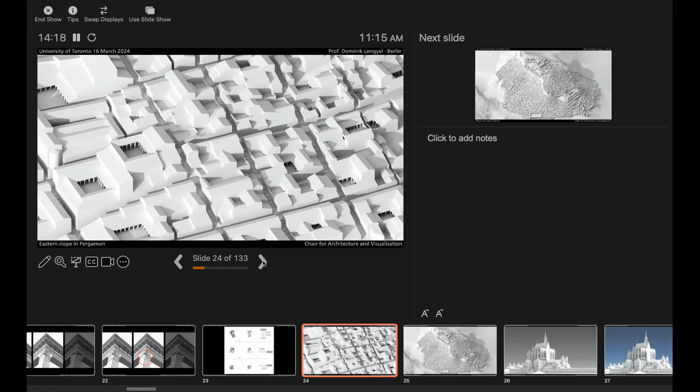And of course, getting the water away—very important. This methodology allowed us to fill the entire mountain of Pergamon in a way that resembles the type of buildings archaeologists assume to be probable, while intuitively not reconstructing or simulating physical reality. The reason it looks so natural is that it's done by hand, by hundreds of students in our seminars.

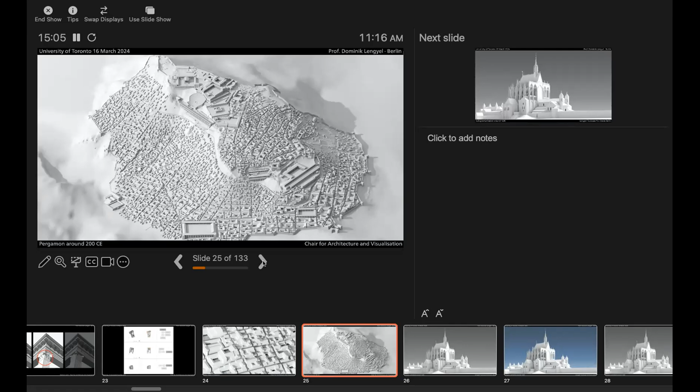We divided them, giving each student a parcel, and explained how buildings were constructed at that time, then let them design—being architects, designing their own small section of this holiday resort, if you want to call it that. In the end, we had a completely heterogeneous result, but still following certain rules—not repetitive, and not algorithmically created cityscape.

Another example that shows different knowledge certainties: this is Cologne Cathedral. You have the Gothic choir, which stands today. You have the last predecessor on the right, which was cut in half exactly along the middle axis to allow construction of the Gothic choir—quite well known because of contemporary depictions from medieval times. On the left, you have a church that was almost not documented. There are foundations allowing us to claim a main nave, two cross naves, two apses, and four towers. Because we don't know much more than these words, all you can see on the left is exactly that.

To make things comparable, we did not depict the existing choir as it is today, with joints and dirt and all that, but reduced it to the same architectural, idealistic way—white and regular, with all pillars identical, even though in reality they're not totally identical. This dematerializing lets you see different architectural styles next to each other, comparing them as they are in the architects' designs—Gothic versus Romanesque versus simple Romanesque in one consistent image. So sometimes we have to reduce the knowledge in order to work together with architectural styles that we don't know much about. It's a kind of weighing against each other.

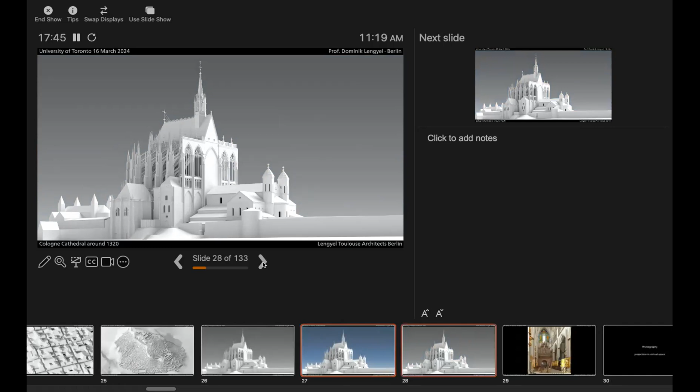If you now look at the sky turning blue, concentrate on the building and observe what happens to it when the sky changes its quality. So now you have a white building, and that's the important difference. Because this is not a white building, it's black and white photography. There are many competitors in the field that use black and white buildings now, but they don't dare to make the sky gray because they think it's ugly. The blue sky is more beautiful, and they don't realize the difference in perception, that this is not a white building.

So if the findings are polychromous, we can follow the same methodology, only showing what we know and not inducing any fantastic creativity that we, of course, would have if we wanted.

In this case, it's the interior of the same Gothic choir. It's a later age, around 1856, just before the demolition of the wall. The wall, if you've seen from the outside, is this wall here in the middle, the same wall that we have in front now. Just before the demolition, they inaugurated the singing choir, and they just wanted to see how it looked like.

So the only colored element that is not based on findings is the organ. But it's so unimportant in its color—it's just showing, well, it's wood essentially, and it has been wood. This is known. All the rest is documented in its detailed color.

Now, why is photography so important? We actually call it virtual photography because we think that we just follow photographic rules, and it's not a rendering. Most people would say if you have a digital model, you do a rendering. Yes, it's true, but a rendering implies so little of photography that we prefer to call it virtual photography. This is actually the epilogue that I added in the end.

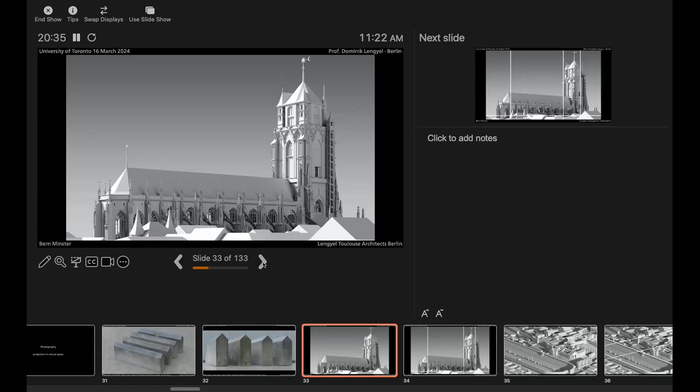But the second thing is straight lines. Usually in ordinary photography, or even in the news, some people that just shoot photography—it's mostly neglected that perpendicular lines remain perpendicular. In real architecture, it doesn't really matter, because you understand architecture since you know architecture. But in case of abstract geometry, you might get completely confused, because it doesn't reveal as many clues as real architecture for being oriented in space vertically. So what we need to do in digital images is be careful to remain vertical when you have vertical geometry.

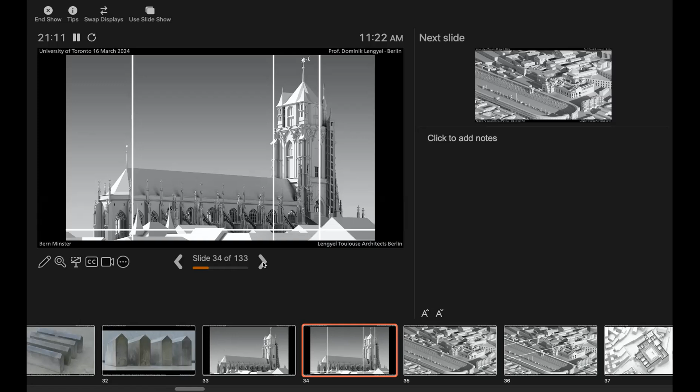Just think of the fortification of Troy again, which is slightly tilted, and this slight tilt is expressing fortification. So sometimes the slightest tilting expresses very important things in architecture.

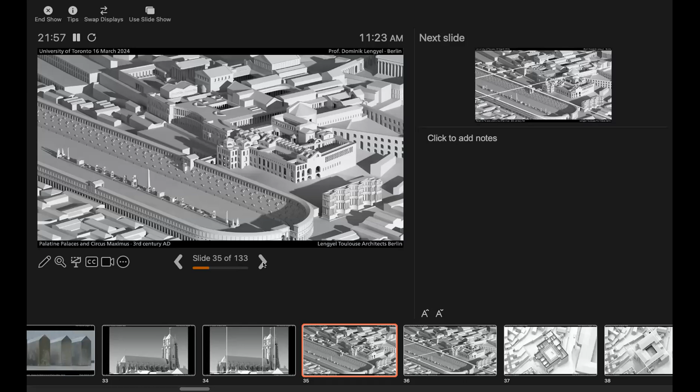Now, if you have to have an overview—Rome, Palatine Palaces in this case—the misunderstanding potential lies in the point of view again, because this is, of course, not eye level. So you might stand on a mountain, and to intuitively make you not think of standing on a mountain, you use projection which is not perspective but parallel. It's called axonometric, and axonometric projections don't have this point in space for the projection. It's all parallel, which means that if you shift the projection or the scene before your eyes, nothing changes except the section of the image.

It's unlimited in each direction, meaning that parallel lines in space remain parallel in the projection. You can even stress this method of projection by using the so-called skewed axonometry, which is even surrealistic. So this one is almost surrealistic—it equals the projection from a very distant point in space.

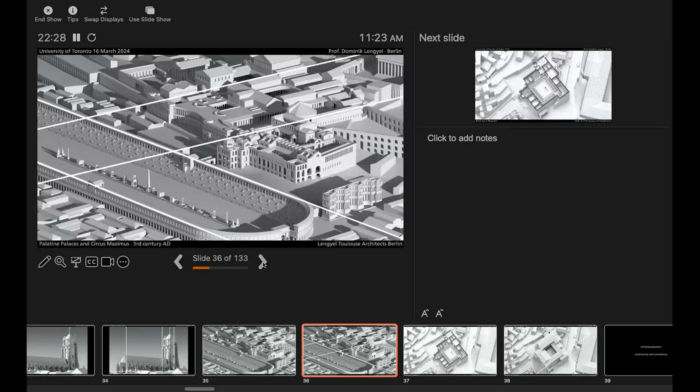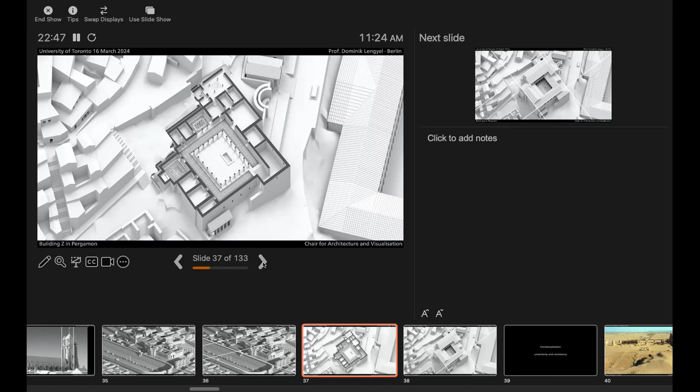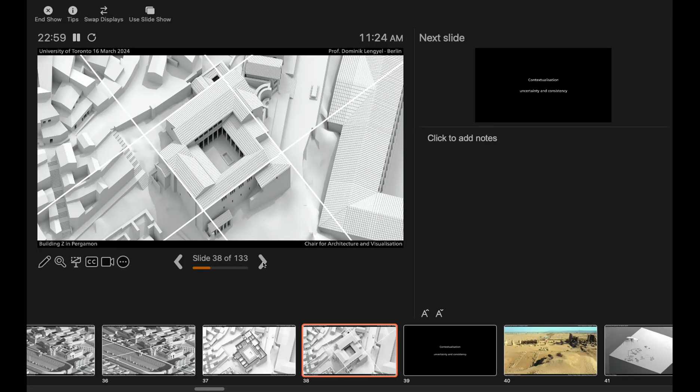Could be a satellite image or so, but this is not realistic. It's entirely surrealistic because it shows the unskewed plan, and at the same time it shows the sides. It's a very common projection technique for churches for the last centuries of architecture. So all we do is assemble centuries-old traditions and put them together into digital images. Again, it's parallel, and you understand the space very well, and you can see straight angles, but at the same time you see the sides, so it's more spatial than a pure plan.

Contextualization is how to put things that are found in space or in other circumstances back into architecture.

Sudan, the royal city of Naga, around 0 CE or BCE, the black zero or the red zero.

The challenge was to develop a kind of vision of the cityscape, which is quite difficult because there's almost nothing.

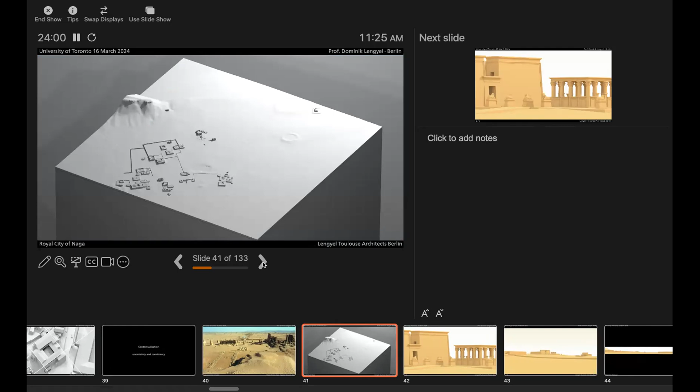What we did is choose virtual photography-like points in space, then project them in very high resolution and create kind of panoramas, 14 meters long with 100 dot per inch resolution, to put them in the museum.

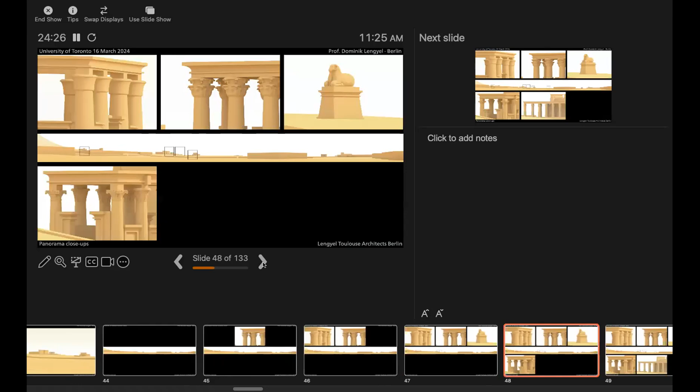So you have the panorama and the close-up, all within the same image. These are real close-ups of the same panorama.

It worked like if you were on site in the museum, you had this as a backdrop from the original findings. And this is one of the temples seen from the inside.

Again, as architects we're interested in the temporality of approaches. This particular vision of being in a very dark interior and looking out to the sun is timeless.

This is Cumae near Naples, a completely different site, thousands of kilometers away, but giving a very similar impression.

So in Munich it was exhibited like this, a kind of real-scale wallpaper to make you feel you were inside the temple.

It's a little bit turned around because these stones stood in front of the temple. But it worked well because you were inside a building, and now you have this look from the inside to the outside.

But the second one was even more interesting — that was the backdrop. Because if you stand there in the museum and look at these heads, you have this high resolution image behind them.

The eyes accommodate for the short distance, and the resolution of the image in the back was higher than what the eye needed. It made you feel standing in the desert immediately.

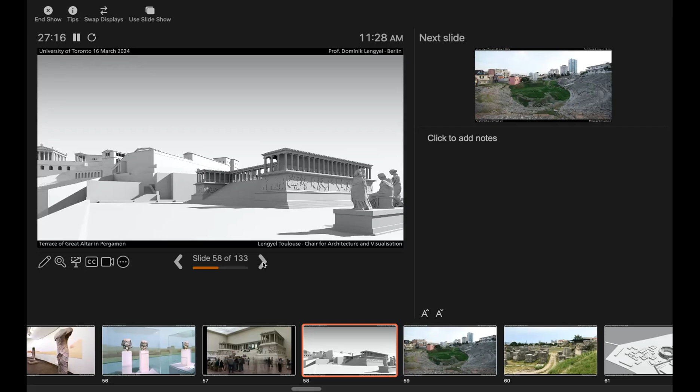The scaffolding was 8 meters tall, with the argument that you needed that height to get a cityscape view. Afterward, we checked whether the ancient architects had thought about that — and of course they did.

This is the cityscape point of view. Maybe they constructed this artificial terrace just to achieve it — it drops 20 meters down if you fall back to the left. They probably built it just to get this prospect of the city.

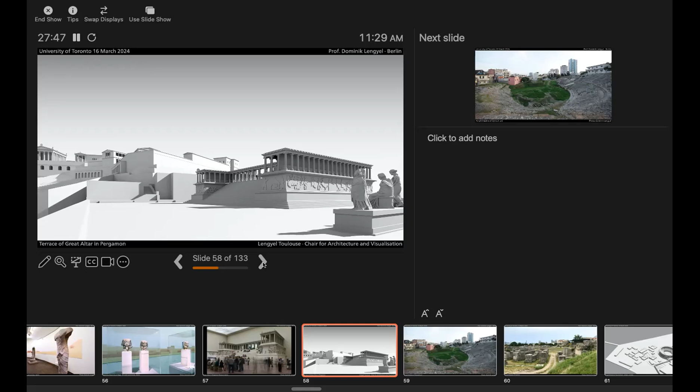So that's one of our overall ambitions: to explore these ancient sites and look for timeless architectural qualities that people thought about 2,000 or 2,500 years ago already, as we do today — or maybe even better.

An amphitheater project in Durrës in today's Albania shows this problematic challenge again. There's almost nothing left, so we compared it with the closest example of a similar area, similar topological and political setting. It might have been the model for Albania.

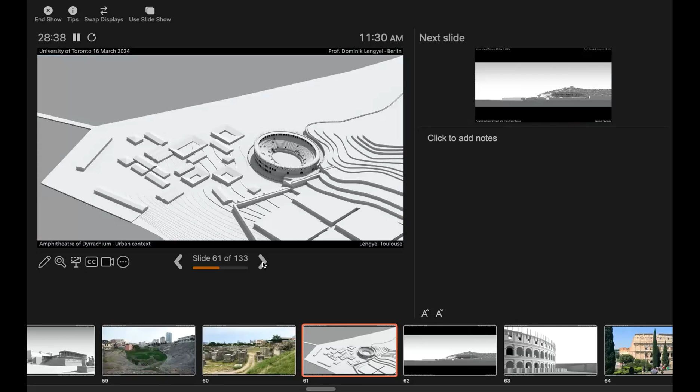This is Pula, a little bit north in Croatia, much better preserved, but no tunnels. So our archaeologists needed the tunnel to develop this theory about being totally asymmetrical in construction and circulation. You see strangely cut things, it's half in the mountain, and all the vomitoria are irregular.

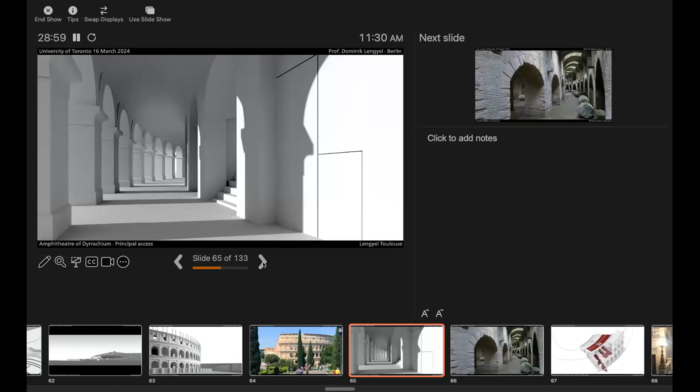The systematics, it's all about idealization. So this is the ideal entrance into an amphitheater. If you compare this with Verona, it's almost similar. This is the standard vomitorium. So idealization, and this is all very important to understand before we come to our Ktesiphon example, which is very, very less concrete.

Again, Palatine, this is what it looks like today. This is how Piranesi looked at it, and this is what we did of it. Again, it was us architects, strangely enough, who for the first time looked from this point of view at the Palatine palaces.

The story behind it is that archaeologists presume it was completely under construction for centuries, so it never looked finished. It was always scaffolded, because they wanted to show the public, the populace, that they were very, very rich and could afford transforming the palaces all the time.

So we thought, well, if it was to impress the populace, why not show it from a seat on the upper part of the seating, seeing these palaces, watching the spectacle of the circus, but also watching the scaffolding, or in this case, the idealized version of the palaces on top.

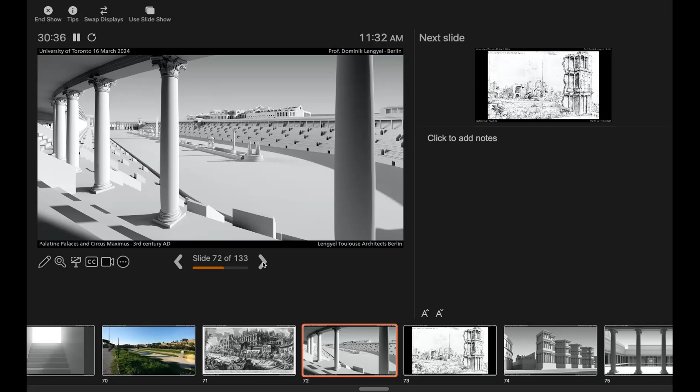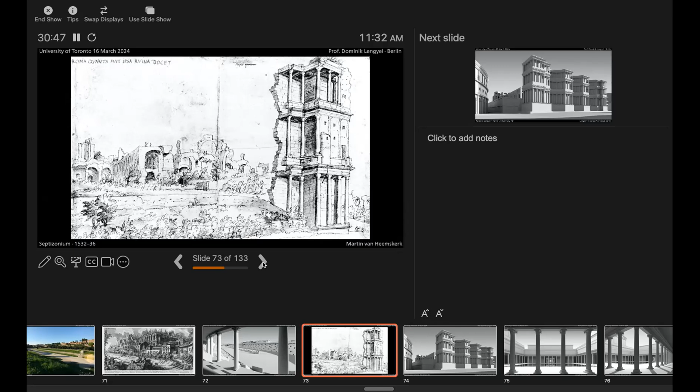There were some parts of the reconstruction that were built, painted, or drawn by people in the 16th century, which were then demolished or just disappeared afterwards. So we had contemporary drawings for reconstructing this.

Septizonium, on the left, you see the circus again. But for us architects, the most fascinating thing is the courtyards on top, because these courtyards are of an architectural quality that we consider timeless.

Just think the columns, the details and the capitals away, and you could feel yourself in a contemporary congress center. It's so beautifully done, the sequence of courtyards and walkways, dark and light, and water basins. You could take it as an example for today, a hotel lobby or whatever you want.

So Ktesiphon is a very, very difficult site. It's a metropolis, but the findings and excavations are very distinct and heterogeneous in quality. We find ourselves in today's Iraq. There are contemporary reconstructional drawings of the setting, and you immediately see it's a pattern of almost nothing.

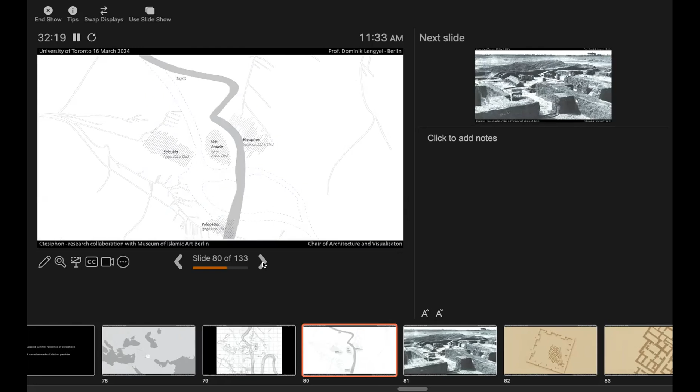So the first thing we did was repaint this plan to explain a little bit what is where. But you see, it's all lined up. Also, the borders of the city are totally unclear, and the Tigris changed its shape and so on.

Now, the excavations were done more than 100 years ago, and they were recovered by soil, so there's agriculture on top of them. We needed these photographs, and this is what we could do with them.

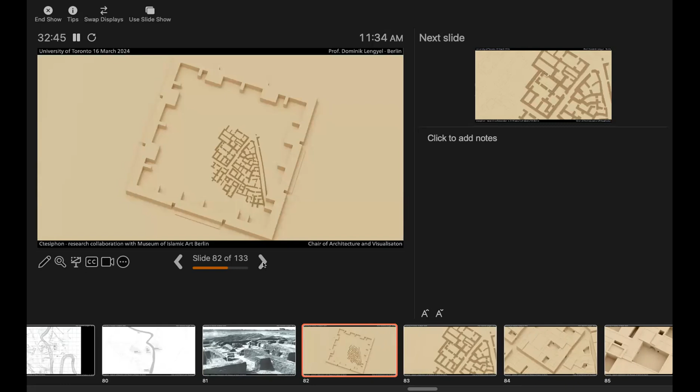This is quite different from the other projects, because of course we could fill it with fantastic pattern, but we wanted to restrict it in this case, to better zoom in with the camera, get closer, and show what we might talk about.

You see here a kind of generic texture of a city of that type, of that time, in this era. But again, this image particularly talks about one finding in this corner here.

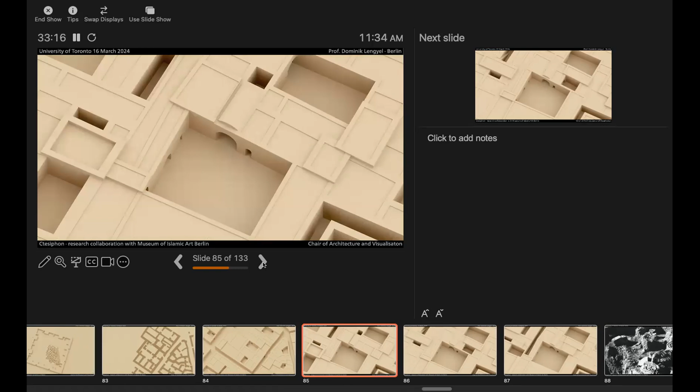The difficulty is already which of the rooms is covered and which is open. We did a series of alternatives here, also for the museum, for the presentation to the public, to understand the difficulty visually without explanation.

You see the same space, one, two, three, with alternative closings. The big courtyard in the middle is open, of course, because it's so big, but the others are totally unknown.

So this is what we call uncertain knowledge. You see three things at the same time, next to each other, which is better than showing them one after another. But now you see visually uncertainty in its raw content.

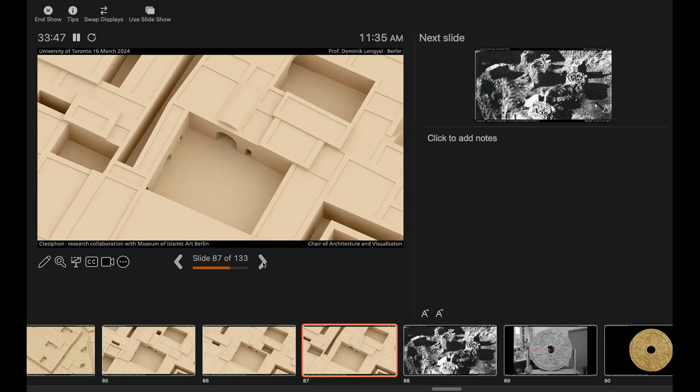Photography sometimes shows these pieces that are very strange, that nobody knows what they served for or where they were installed. So we need them a little bit, but it's totally unclear. This is one space which is particular because it contains the single polychrome statue found there.

And this is the second or third part of Ctesiphon you need to now bear in your mind to get this overall image of the city, because the next one is the stadium. The stadium is quite clear in its appearance, so they are quite certain about what it looked like. Then you have more ornaments.

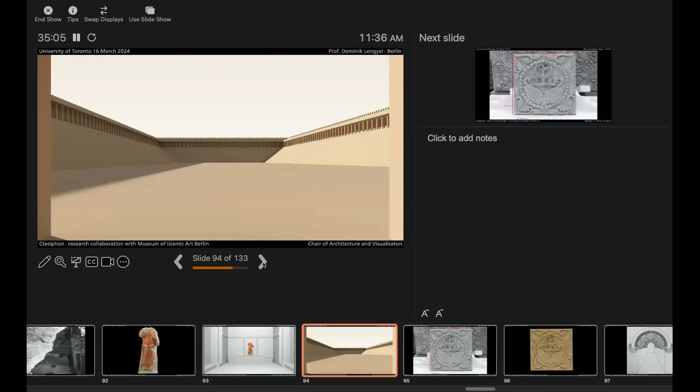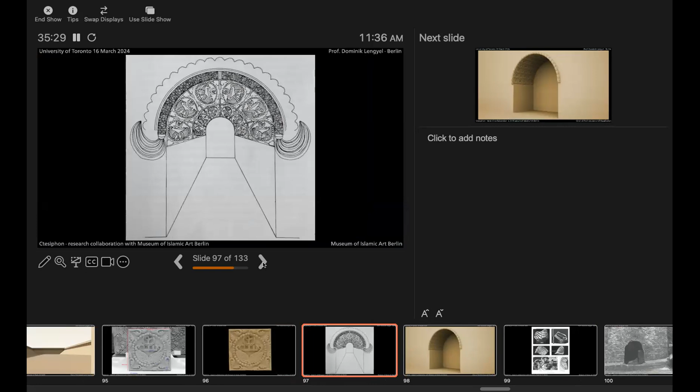This is the measure about the depth. It's an important information, but this is what it really looked like. Then you have contemporary, or not—you have first excavation hypothetical drawings of that. It's kind of an idealistic mental image. It's not even correct geometry, it's not a perspective, it's a mental image.

So what we created is a perspective image of that mental image, and this looks like that. We have more findings, more photographies, more close-ups, and what we did here is take the next mental image, combine it with measured findings in the museum, look at the findings at the museum, also analyze them—which is original, which is not, because it's not so much original as you would think at first glance.

And then we put it again into a setting that recontextualizes them with a kind of trompe-l'oeil, which was used mostly in the Renaissance. So if you enter the museum space in Berlin, you think you have an audience hall in the back with this recontextualized ornaments I've just shown you before, and the fragments that are there.

And you can sit in this, but in reality it's a trompe-l'oeil. So if you see it from the side, it's just a print on the wall, and you can sit in, but you don't actually sit in—you sit before it. So the closer you get, the more it reveals that it doesn't work. We calculated the perspective to the point where you enter the space, and it worked quite well. People really approached and were disappointed that it was just a trompe-l'oeil.

Now why is it important? Because audience halls are said to be prototyped by the Taq-e Kisra in Ctesiphon, so you all know that. So we show to the public that overview. And how is it today?

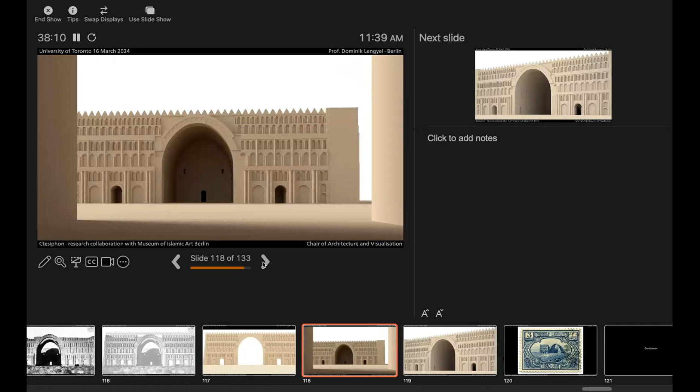And seeing from the side—and that's the first time—it resembles the photography of 2013, but it's complete. We did not want to show more. So this is all we know, not more, but not less. It's an exact, what we call translation from words and knowledge into image. It still reveals architectonic qualities—it talks architecturally.

You think you are in front of it, and of course you have to be adapted a little bit to abstract geometry, but you don't need lots of fantasy to imagine yourself standing there on site. And this was the former conclusion of the talk. It's just very interesting that the state of Iraq really identifies itself with this very interesting building.

So the conclusion would be that digital visualization, if you do it seriously, consists of design of abstraction, refusing and rejecting proposed reality by fantasizing virtual reality and imitating Hollywood, but using virtual photography to make abstract geometry look as if it was built. This is the most important thing we think, and this is the epilogue I created for you half an hour ago, because we're just dealing with this.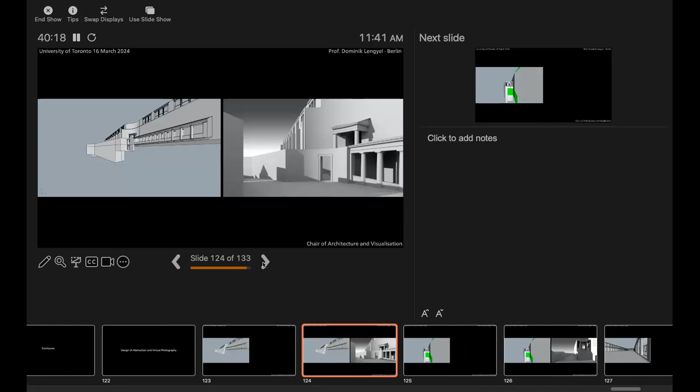And if we take the angles that the museum wished from us, from the digital model, this is what you get, and this is what we make of it. This took about 10 steps and lots of negotiation, and of course experience, and a kind of photographical immersing yourself, fantasizing yourself being on site.

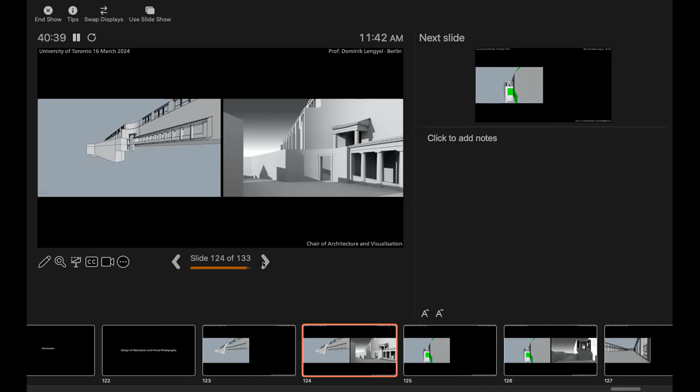What would you look at? What would you want to see, and what would you see, and where do you stand, and what kind of lighting? It's all realistic lighting, so I can't tell you the time and the day, but it's changing - seasons and daytime, of course. And it's getting more and more difficult because how do you present this thing?

It's just not architecture. It's very strange. So you have to think about, of course, the context is in the model too - I'm cheating a little bit. The context is there, but it's a kind of angle.

On the left side, we always start with 11 millimeters focal length to see the overall, and the solution on the right side is 50 millimeters - standard lens, standard photographic lens, standard analog photographic lens. And you have this courtyard, which is a little easier, but again, what do you do with this totally empty square in the middle?

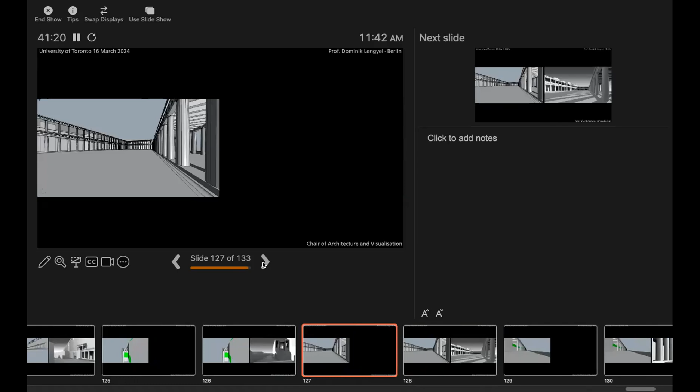You could fill it with dirt, what most people would do, or you just use the light. And with the light, you have it filled, and it reveals a lot of spatial qualities, and you do not want to have dirt anymore.

So we like to call it blood, sweat, and tears, according to the band. But blood, sweat, and tears really refers to what people would usually put in the scene on the left to make it look neat or attractive. But if you want to stick with science, you just take what you know - you know the sun was there all the time, so you can use it just for filling. It's theatrical stage design, if you want, but it fulfills its purpose.

This was the most difficult one - a long hall with nothing, and then a terrace with nothing, and even in the view on the right, there's nothing. So what can you do?

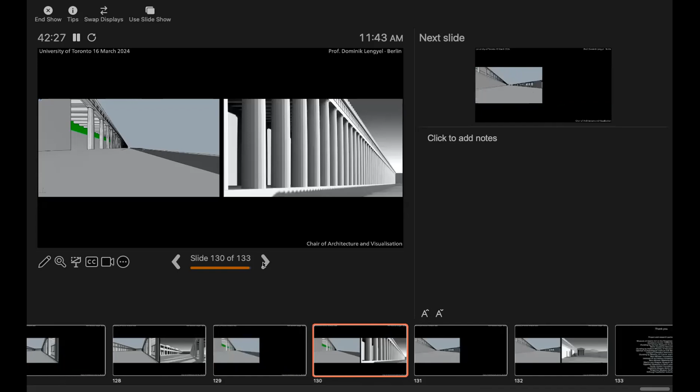Use an architectonic special lens for photography, a lens that can shift to the left and shift upwards. So you have a double shift here, and then use light again and concentrate on the things that are at least a little bit interesting. Now you have an attractive sort of colonnade on the right, which is probably Metropolitan Museum of New York - that kind of language - and you lose all the boring things that you have on the left side.

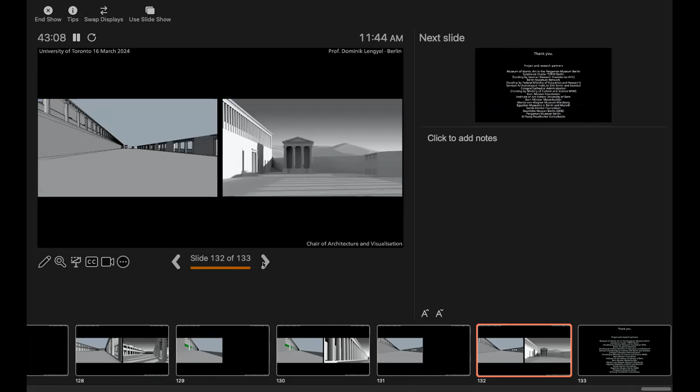That is one terrace up, similar setting, little to see, but there's a temple on the end. So we switched the length of the lens from 11 millimeters to, I can't tell, probably 120 millimeters or even 200. Just close up, use the sun again, and then it's okay - at least it's an attractive place again.

And we will see what the museum thinks, but we are confident that they will like it. So thank you very much.